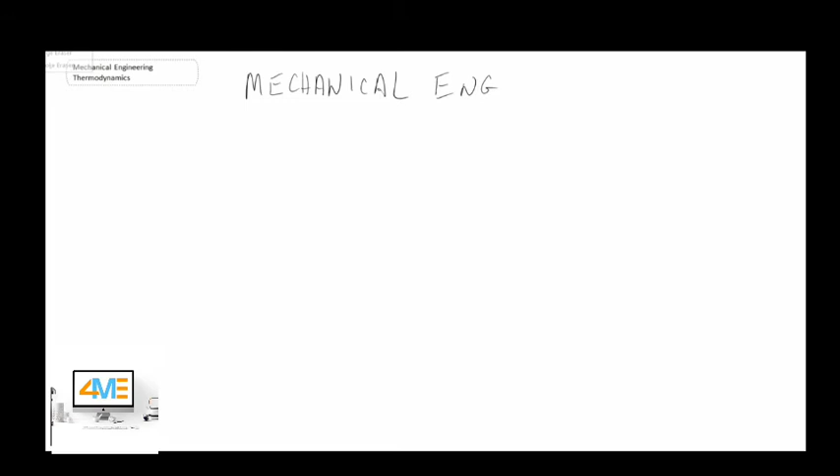In Mechanical Engineering Thermodynamics, what we will do is begin by looking at the definition of thermodynamics. And what we're assuming is that this would be your second course in a thermodynamics curriculum.

So in the first thermodynamics course, you would have covered things like the first law, second law, perhaps the Rankine cycle, properties of materials. In this course, what we'll be doing is we'll be going a little further with the concepts, and we'll be applying the things that you covered in a first introductory course on thermodynamics to a lot of systems that are important to mechanical engineers.

And consequently, a first course in thermodynamics has a tendency to be a little bit on the abstract side. This course has a tendency to be more on the applied side. So personally, for myself, I found this course very rewarding because we're looking at systems that we can relate to.

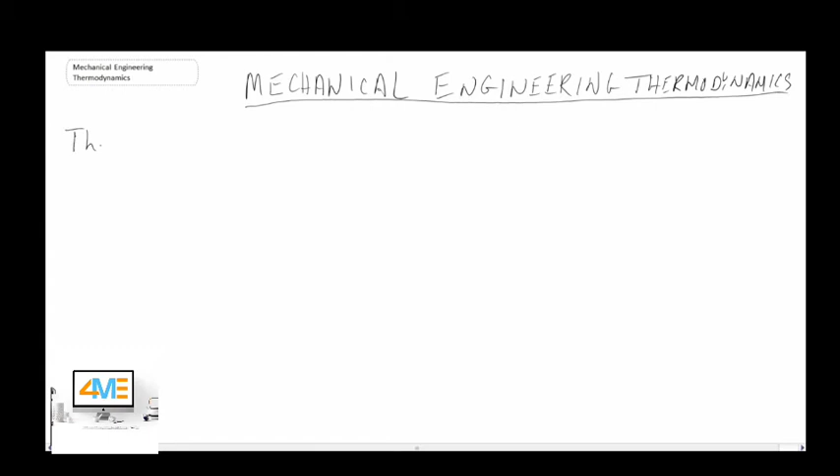But what I want to do at the beginning here is step back and take a look at the definition of thermodynamics itself. So thermodynamics, there are a number of different definitions that you'll find. Sometimes people will say thermodynamics is the science of energy management, but essentially what we're doing is we're looking at the transformation of energy from one form to another.

Remember, energy cannot be created nor destroyed. It is merely transferred from one form to another. And it could be internal energy, it could be potential energy, it could be kinetic energy. And through those transformations, we also have energy in the form of either work or heat. And those are the things that thermodynamics looks at, the relationship of energy transforming from one form to another.

So to put a definition, thermodynamics is the study of energy transformations

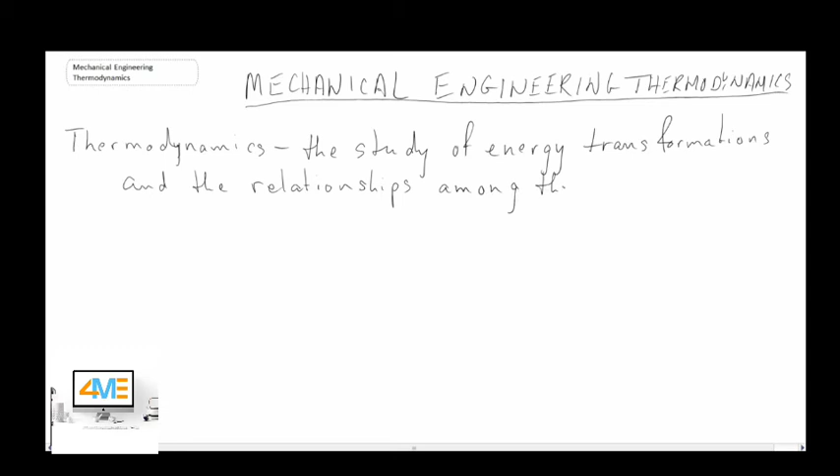and it's a study of energy transformations and the relationships among the physical properties of substances which are affected by those transformations. Now, quite often those substances in any kind of thermodynamic cycle that a mechanical engineer would be interested in are referred to as the working fluid.

So that provides us with the definition of thermodynamics. Now, in this course, what we will be doing is we will be applying thermodynamics, as I mentioned, to a wide variety of systems that mechanical engineers may be dealing with.

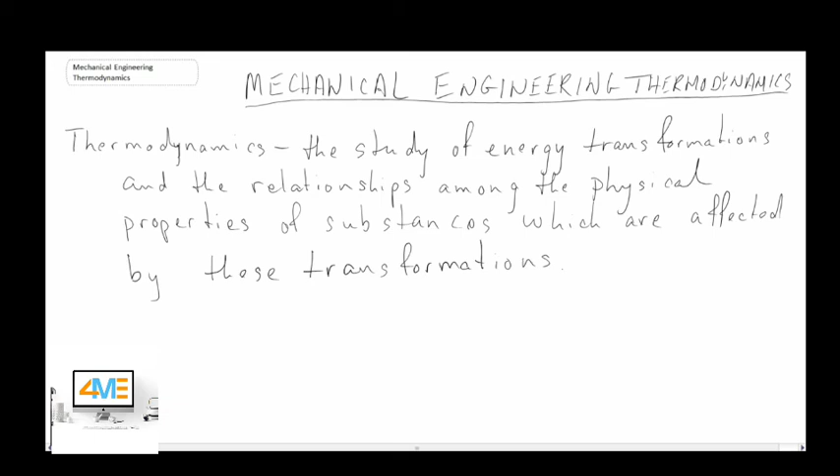So what you could look at in terms of the areas where thermodynamics would be applied, it can be applied to very diverse areas. And these can consist of a number of different things. One is power production. Power production is an area that is very important in modern day society.

We have power production, which is generating the electricity by which I'm recording this lecture. And that's referred to as being a stationary power production system, because usually I'm recording this from China. And so the power here is probably, my guess would be coming from a coal burning power plant. If I was recording this from northern Germany or Denmark, for example, then perhaps it would be coming from wind energy. So those are referred to as being stationary power production units.

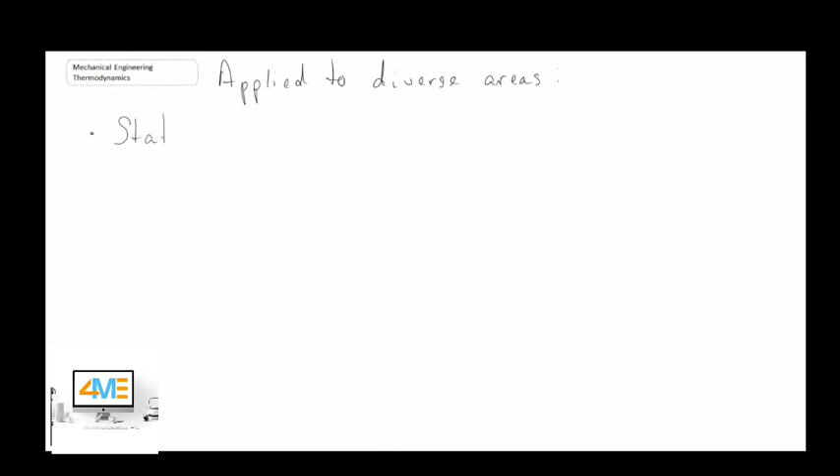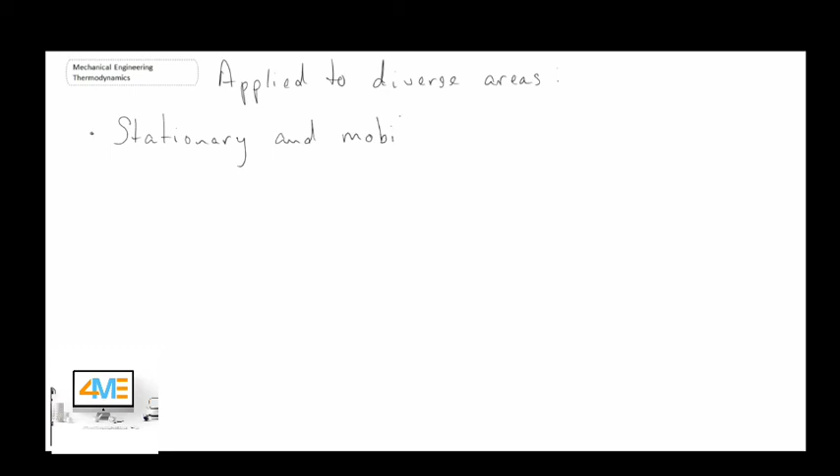And then we also have mobile power producing units, and these are units that, just like it sounds, are mobile. So it could be the engine in a motorbike, the engine on an airplane, it could be the engine in a car. Those are all power producing units that are mobile because they're moving around. So that is one area that you can apply thermodynamics, both stationary, so power producing units that are tied to the ground and not moving, and mobile power producing units.

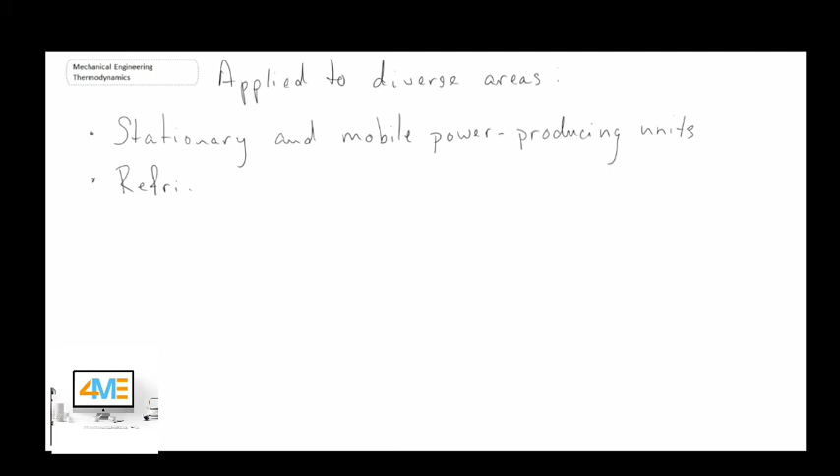A second area that you can apply the concepts of thermodynamics to, and we will look at in this course, is what is referred to as refrigeration and air conditioning processes. So refrigeration is one process that we will be considering in the course, as well as air conditioning processes, quite often referred to as heating, ventilation, and air conditioning, or HVAC.

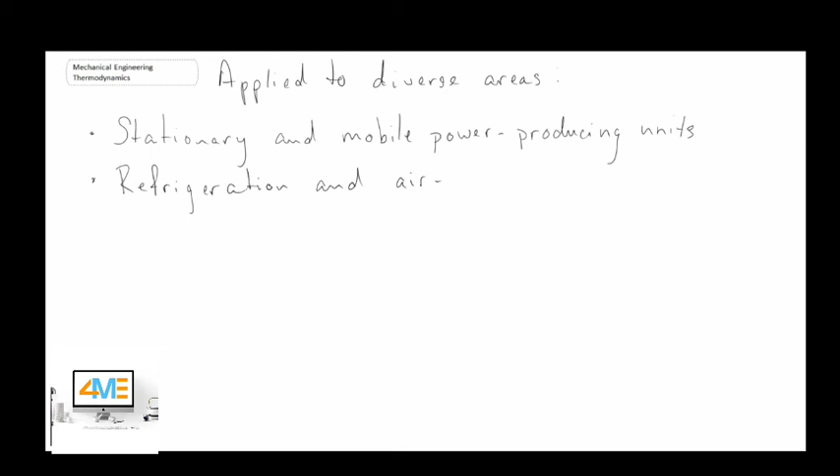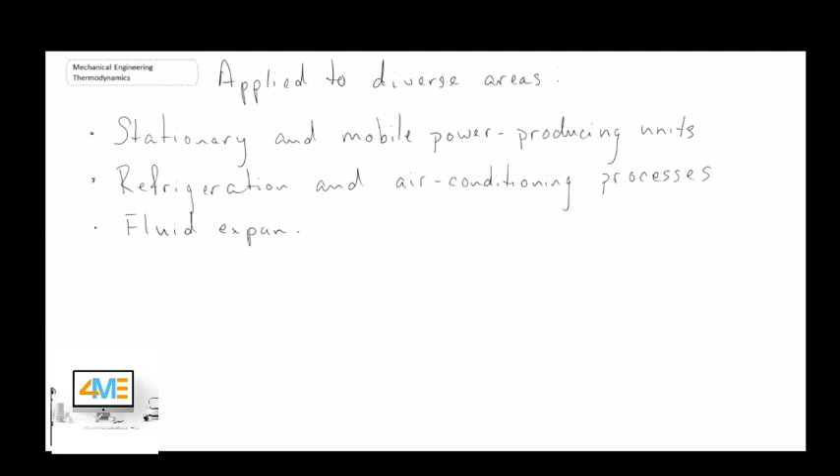Another area that we can apply thermodynamics to are fluid expanders. And those are quite often referred to as being turbines and compressors. And actually a pump is a form of a compressor, but it's for a liquid. Traditionally, when we talk about compressors, we're talking about a gas for the fluid that would be going through.

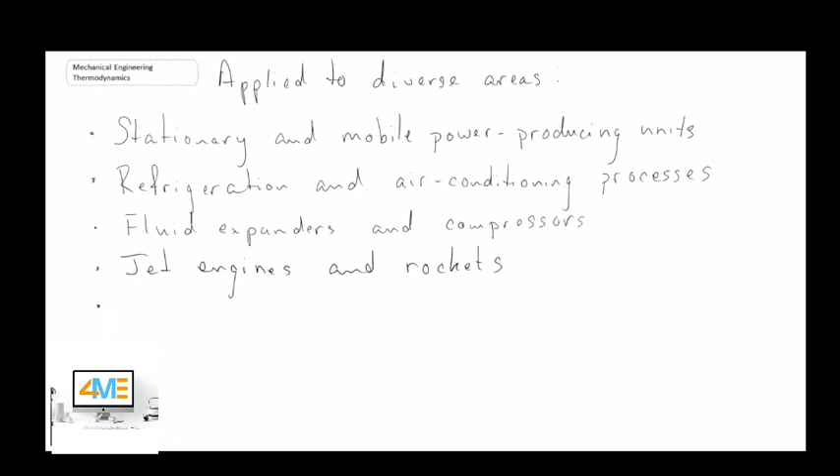Other areas: jet engines and rockets. And so we will be looking at the cycle of a jet engine later on in the course, and that is referred to as being the Brayton cycle. We won't be looking at rocket propulsion in this course. However, for rocket propulsion, you would use all the laws of thermodynamics and then chemical reactions for whatever reaction is taking place in the rocket. Other areas where you could apply thermodynamics: chemical processing in oil refineries.

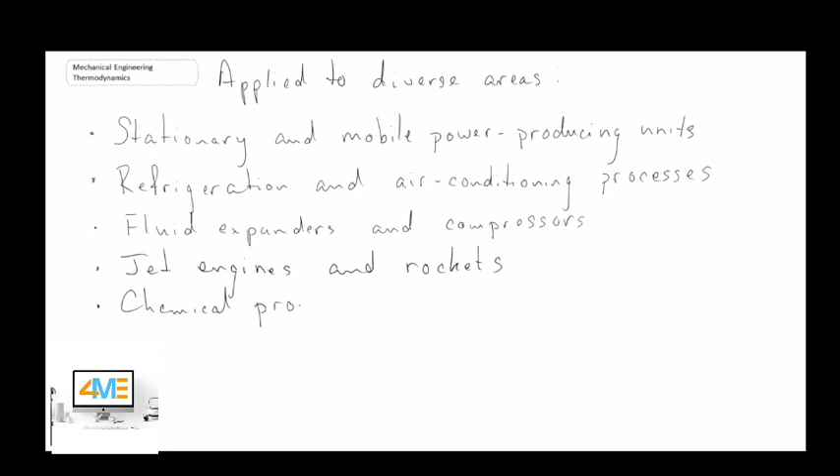This is an important area for people within Alberta because a lot of our energy and a lot of our industry is related to the oil and gas sector. And consequently, the processing of any of the oil, be it conventional oil, be it heavy oil, or bitumen from the oil sands, needs to undergo forms of upgrading and refinement. And you would be applying the rules of thermodynamics there.

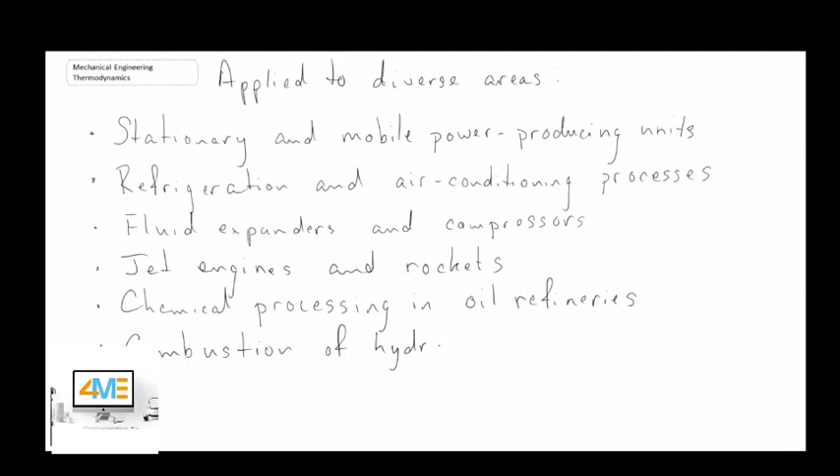Once you have that, let's say you make gasoline, what we often do with gasoline is we burn it. And that is really referred to as being combustion. Combustion is the process. So we could be looking as well at combustion of hydrocarbon fuel. And that is something that we will also be looking at in this class.

Later on, we'll be looking at what's referred to as the heat of formation within a chemical reaction. And from there, that's how you can figure out the amount of energy being released through combustion. And there you're converting chemical bonds into thermal energy. And so we'll be looking at that.

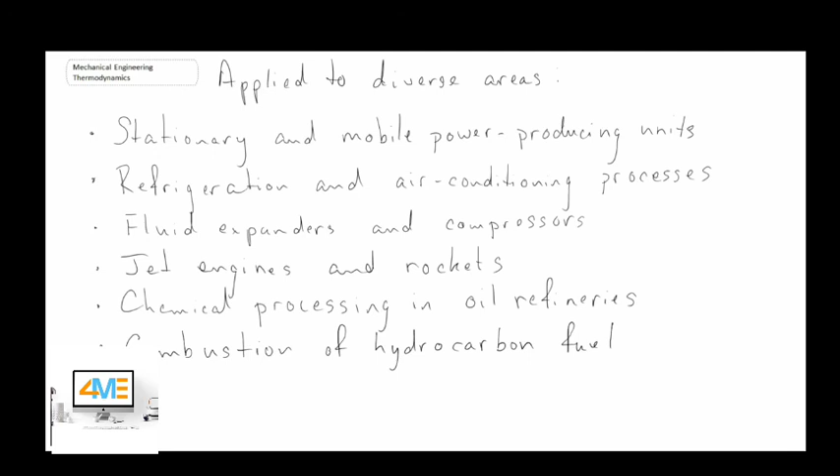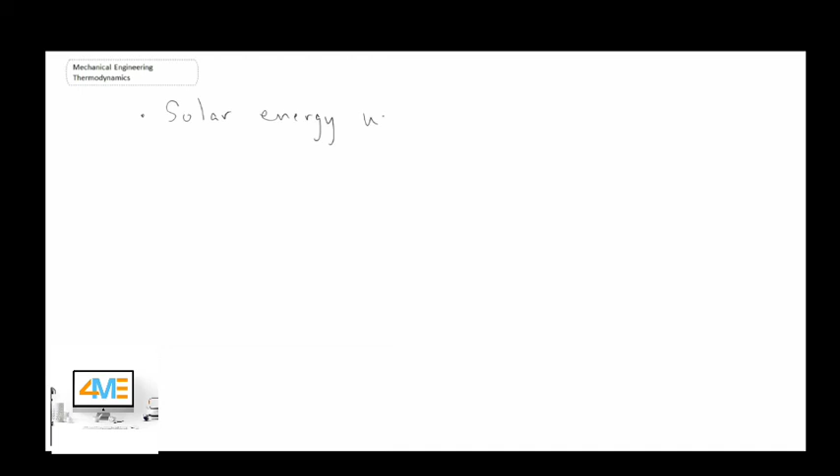And then if we go into other forms of energy, more on the renewable side, we could be looking at solar energy units. Now, when I'm referring to solar energy here, I'm really referring to solar thermal. However, there are certain systems that use solar energy that can produce electrical or mechanical work, which you would then put into a generator and convert to electricity.

But when I'm talking about solar, I'm not talking solar photovoltaic. I would be talking about solar thermal systems that could either generate thermal energy for household use or industrial use, or could also generate power, so mechanical work, as well as thermal energy. So that's what we're referring to when we talk about solar energy units.

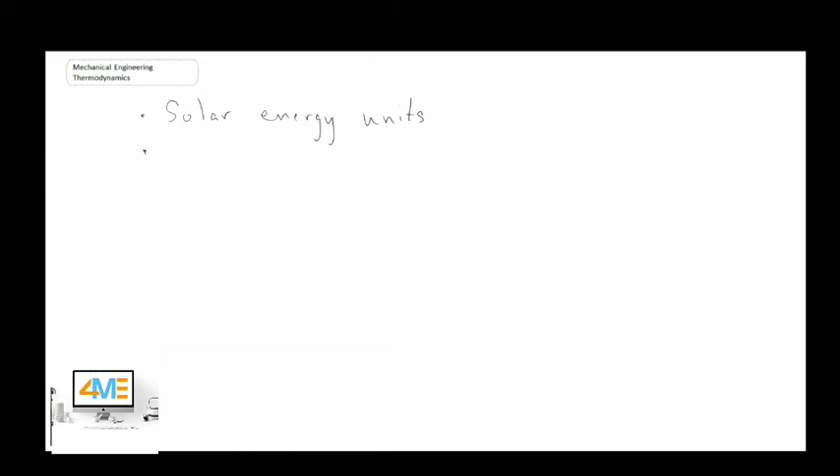Another area, geothermal energy utilization. When you're talking geothermal, essentially what you have is a system whereby you're bringing heat up from deep underground, quite often in geologic formations where you may have mountains, such as Nevada. That's one location where they have quite a bit of geothermal energy. And Iceland as well, that would be another example.

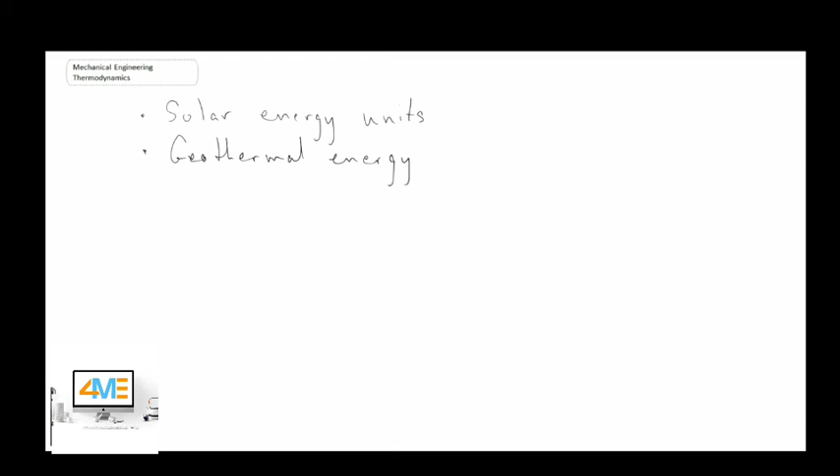And so you're bringing up heated fluid and you're putting that into what we would call a heat engine, or it could be a Rankine cycle, anything like that. And you're producing work through that process. So that would be geothermal energy utilization.

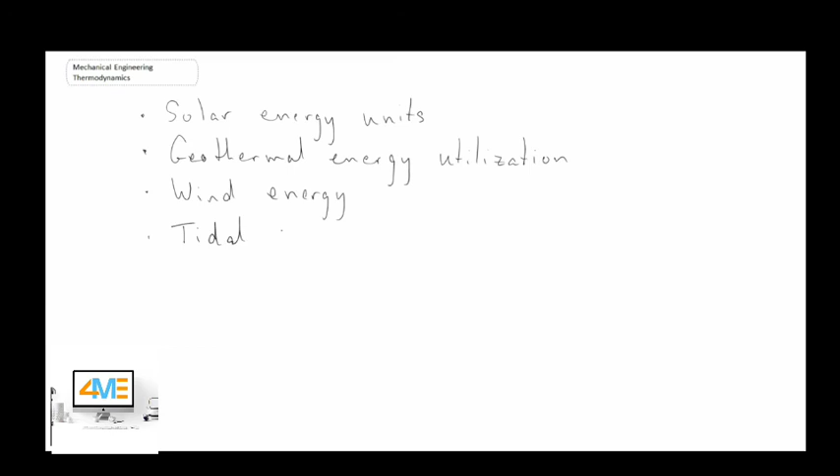And wind energy. Wind energy is another area. We won't necessarily be looking at it in this course. However, the laws of thermodynamics would apply to wind energy. You'd also have fluid mechanics involved, and aerodynamics. And finally, tidal power is another system where you may be applying the laws of thermodynamics.

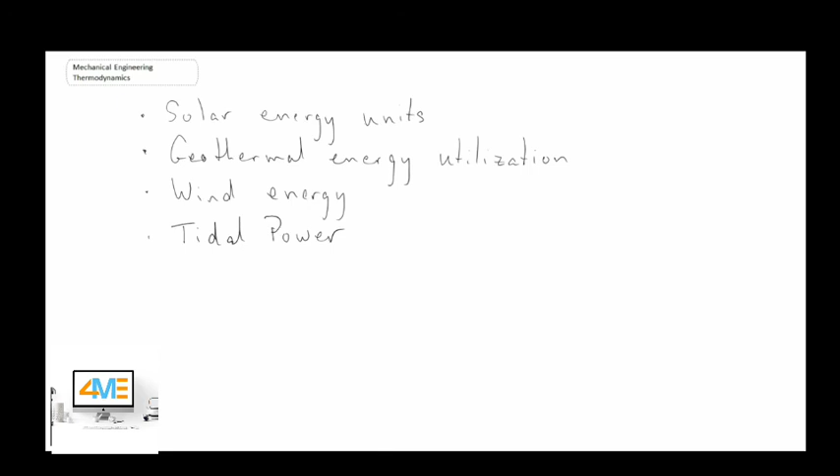So you can see there are many, many different areas where we can be applying thermodynamics, and in particular areas where mechanical engineers would be involved. And we will be touching on a number of those areas throughout this course.